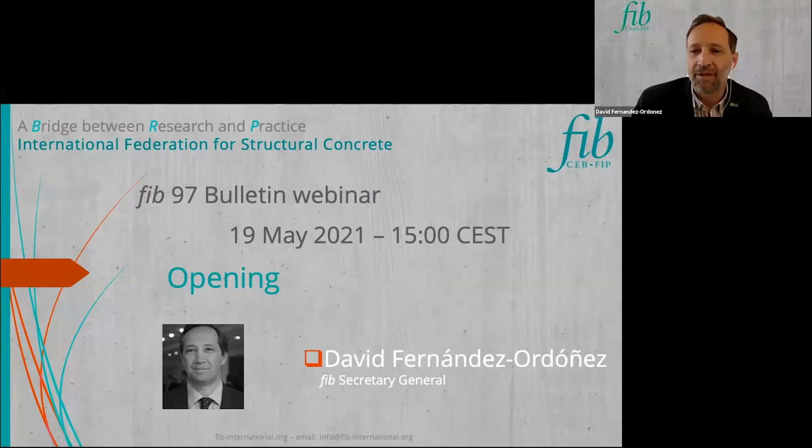The FIB is the merge of two former associations from the 50s, the CEB and the FIP. In '98, both associations, which had been collaborating for many years, created what today is the FIB. We have 41 statutory countries, as FIB is a federation of 41 countries, but we have members from more than 100 countries. So we have an association dedicated to structural concrete that is very widely represented in the world.

The FIB is organized around the general assembly, led by the countries. Then we have a technical council that takes all the main decisions, and a board that is the presidium, with the secretariat behind the presidium. Then we have all the commissions, task groups, and working parties, which relate to the technical council, the main technical body of the FIB.

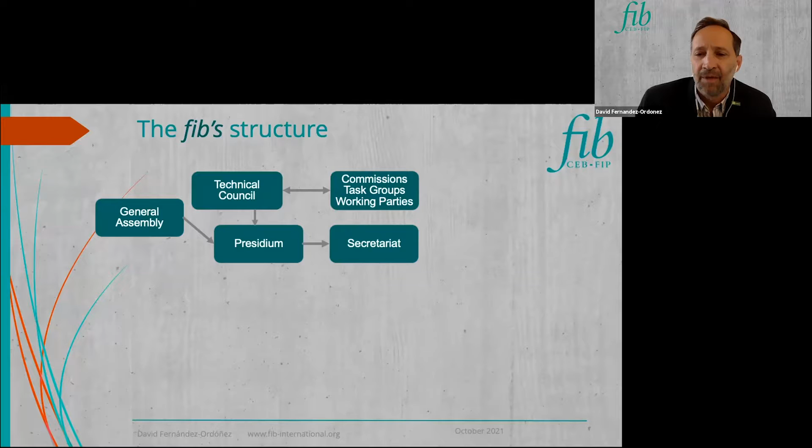As you can see, we have many commissions. Today we are presenting a document regarding Commission 5, Reinforcements. This is a task group within this commission. I don't have time to explain all the task groups in the FIB, but I can tell you we have more than 70 task groups developing documents for structural concrete technology.

We have several ways of publications. One is the journal, Structural Concrete Journal, which is now in a good position in civil engineering with a good impact factor. Something interesting here is for researchers to publish papers for free. With many countries, you can also publish open access papers for free, because there are agreements with some countries, for example Germany, Spain, Italy, and many others. So I would recommend you take a look, as maybe you can publish open access for free.

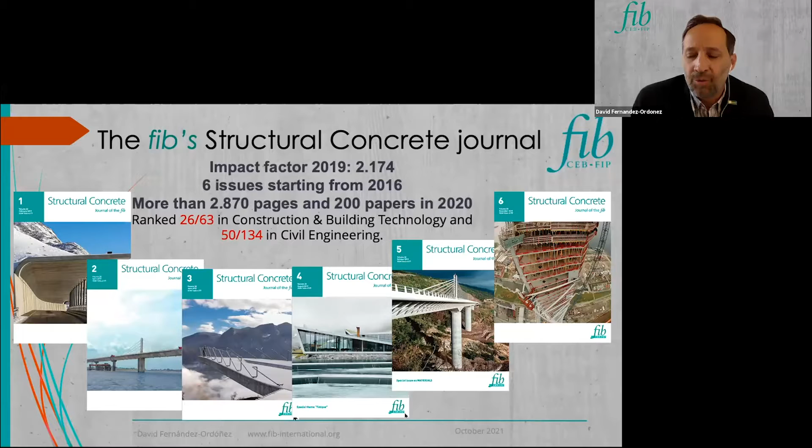As we are today with a lot of people from practice, we have a kind of paper that is very short, called project notes, simpler than a research paper. It's 3 pages and dedicated to nice projects. So maybe I would recommend that with the nice work you have done with your company, you try to bring some of these works to the journal. And then we have the bulletins.

We are presenting today one of the bulletins. As you can see, we cover many different topics, from prefabrication to fiber reinforced concrete or submerged tunnels. Today we are talking about pre-stressing. There's a lot of information about this, and you can find all of them on the FIB website.

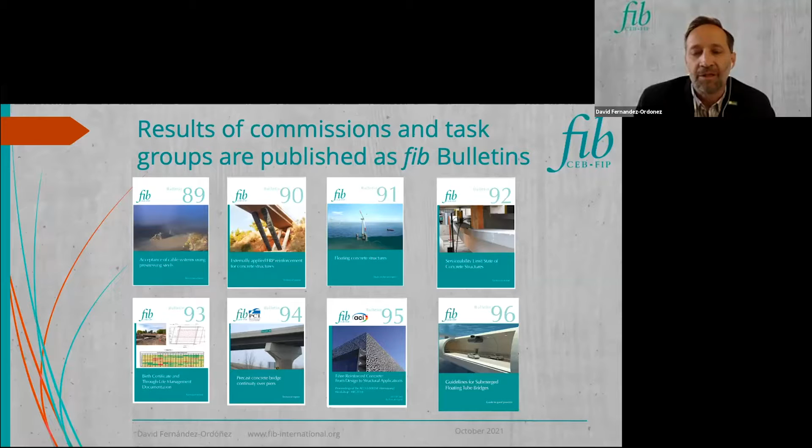I would like to tell you that on our website, FIB subscribing members and associate members can look at all the FIB bulletins, CEB documents, and FIB documents. They can see them in a viewer that is embedded in the website, which is very interesting if you want to find a document and take a look at it.

What are external tendons? External tendons for bridges, as we will refer to them throughout this webinar, are unbonded tendons made of pre-stressing steel, which means high-strength steel and low relaxation. These are tendons external to the concrete section, as opposed to internal tendons, and external to the concrete section, but located within the limits of the structural depth, as opposed to, for instance, extradosed cables. The FIB Bulletin 97 that we are presenting today covers the use of these external tendons on bridges.

Bridges are the sort of structures for which the technology was first developed and mostly used. But there are no limitations for application of the same technology for other uses. A typical example today is the use of external tendons in wind towers. But let me go back to bridges to explain a bit the history of that.

The history: the concept of post-tensioning has been recognized for over a century now, and interestingly, early development started with external tendons. If we go back to 1888, the engineer Peter Hugh Jackson filed a patent on internal and external post-tensioning concrete pavement. 40 years later, Eugène Freyssinet and Jean-Charles Séailles filed a patent on internal bonded post-tensioning, with the novelty that it was using high-strength steel.

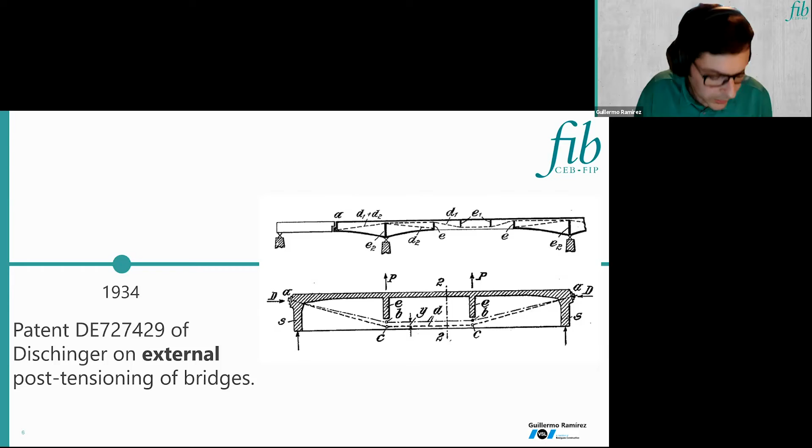It is the use of high-strength steel which soon enabled the crystallization of all these ideas and patents into actual structures. In 1934, Franz Dischinger filed a patent specific to our subject today: external post-tensioning of bridges. Shortly after that, the idea was brought to reality, and the first post-tensioned concrete bridge with external tendons was built in Aue, Germany. The tension was applied by externally arranged bar tendons using steel that could be restressed to compensate for the losses in stress due to creep and relaxation.

1938 saw a couple more early applications of external tendons using steel bars together with some innovative techniques. Near Stockholm, the Klockestrand Bridge, designed by Häggblom, was also built using external tendons made up of steel bars. And in Wiedenbrück, Germany, a bridge was built using external tendons stressed by application of the so-called system Finsterwalder, after its inventor. This system is based on stressing the tendons by direct action of the self-weight of the structure.

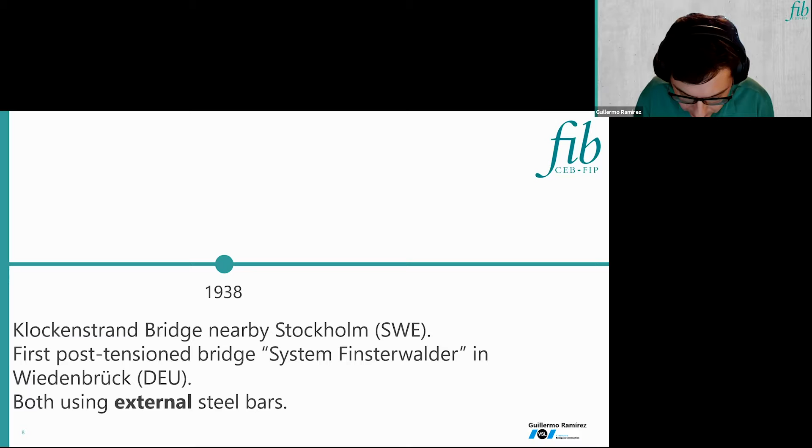Fast forward, during World War II, many military structures had been built using internal tendons, which helped develop and popularize this technique that soon became the state-of-the-art for concrete bridges around the globe. The steady progression of pre-stressed concrete in the 1950s to 1970s, stimulated by the reconstruction of Europe, requested efficient construction technologies for bridges, which contributed further to the development of post-tensioning with internal tendons, and therefore very few applications used external tendons until the late 1970s, when there was a resurgence of external post-tensioning in major bridge construction.

The design of larger bridges pushed the application of bigger tendon units, and these big tendons could not be embedded in the concrete webs without significantly increasing the web dimensions, which would have driven big increases in the structure's self-weight. The need to minimize this self-weight was a driver for external tendons.

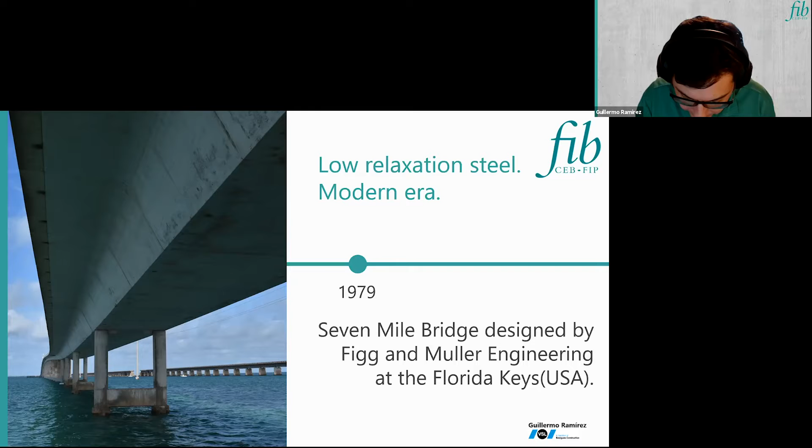Additionally, precast segmental bridge construction started to become more common. The use of external tendons in this kind of structure allowed fulfilling the need for continuous tendons through the joints. One of the first major applications of external tendons took place in the 1970s for construction of the Long Key and the Seven Mile bridges in Florida, USA.

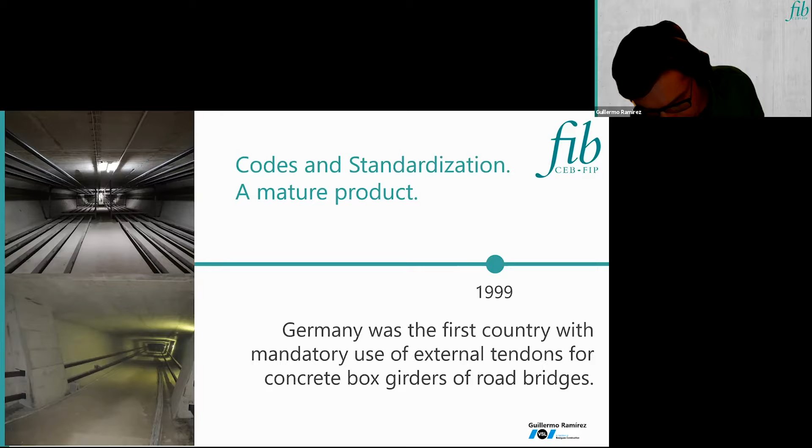1999, with the turn of the 20th century, it can be said that external tendons had reached maturity, and we started to see international codes, regulations, and standards being published. In 1999, Germany made the use of external tendons mandatory for road bridges built with concrete girders.

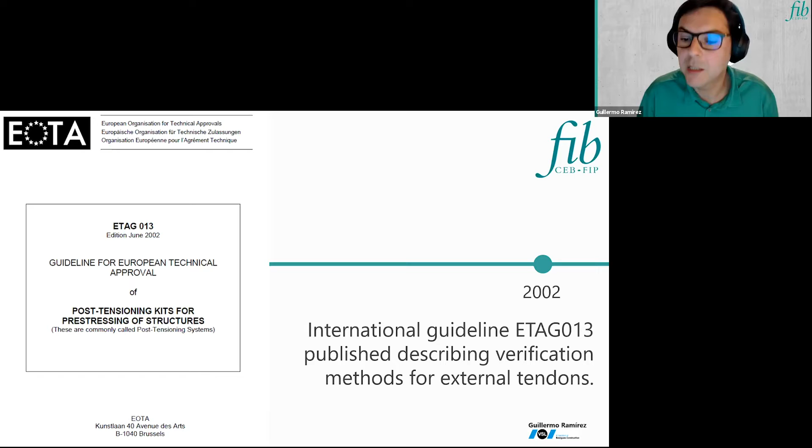2002, the first international guideline for technical approval was published, ETAG 013, covering all types of post-tensioning kits, including sections specifically describing verification methods of external tendons. In 2012, 10 years after ETAG 013 was first published, FIB Model Code 2010 extended the content of the previous model code and included rules for design and detailing when using external tendons.

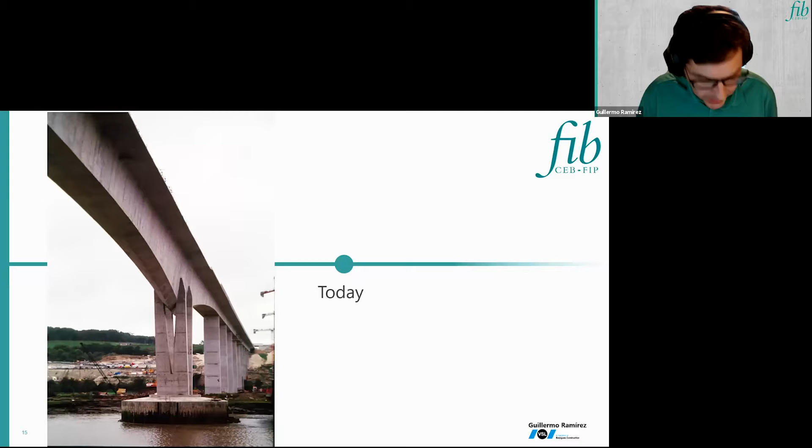And that leads us to today. More than 125 years after P.H. Jackson's first patent, external tendons have become a fully developed technology with applications on post-tensioning of segmental bridges, post-tensioning of box girder bridges, and strengthening measures.

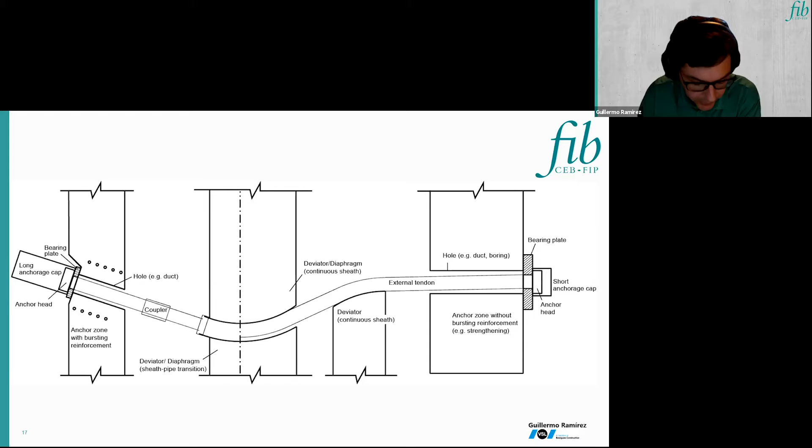Let me shortly present you now the primary components of these external tendons: anchor heads, wedges, bearing plates, long caps, short caps. The list of different components in an external tendon can be quite long, but a lot of these components are common to all types of post-tensioning tendons. Therefore, I will now focus only on a selected few which are specific to external tendons.

I will start with the main tensile elements and different combinations. As external tendons, we can find bare strands inside the global polyethylene duct with a filler, which can be either grout or soft fillers such as wax, grease, or gels, and we can have the same configuration with wires instead of strand.

Adding an additional layer of protection, there's the option of monostrands inside the global PE duct, all filled with cement grout. Still with strands, we can find some options as just described, but without the cement grout. These have

less layer of protection, and the outer ducts serve the purpose to help during the installation. The option is found both with round pipe and rectangular pipes.

To finalize this review of strand applications, we will see examples of single strands, either monostrands or epoxy coated. We also find tendons with post-tensioning bars. These bars are commonly found inside PE pipe with filler, again either grout or soft fillers, or wrapped with a tape system. You see there's quite a big variety as opposed to internal tendons. We do not typically have all these combinations.

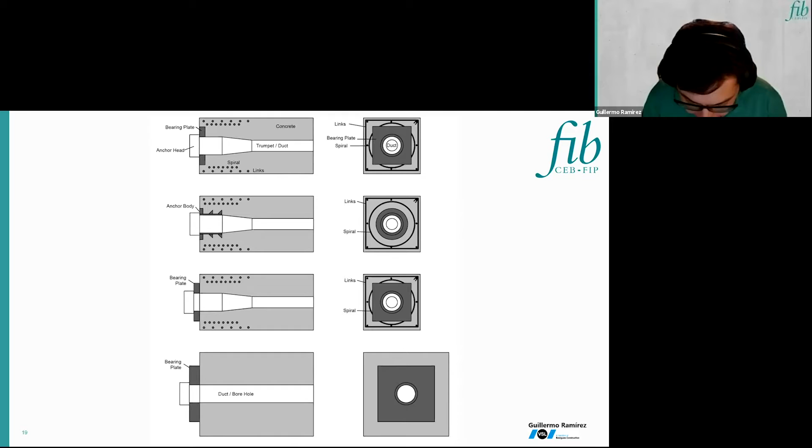If we move now to the anchorages, at first sight anchorages for internal and external tendons are not fundamentally different. They can both be composed of anchor heads, bearing plates, anchor bodies, and reinforcement steel, but there is one difference that I want to bring your attention to. Anchor bodies or bearing plates can be cast in structural concrete in combination with confinement reinforcement, only for new bridges or strengthening measures which include the addition of new concrete elements.

Some strengthening measures, though, require direct load transfer to old concrete. In these cases, additional confinement and bursting reinforcement cannot be installed, and then usually larger, specifically designed bearing plates are required.

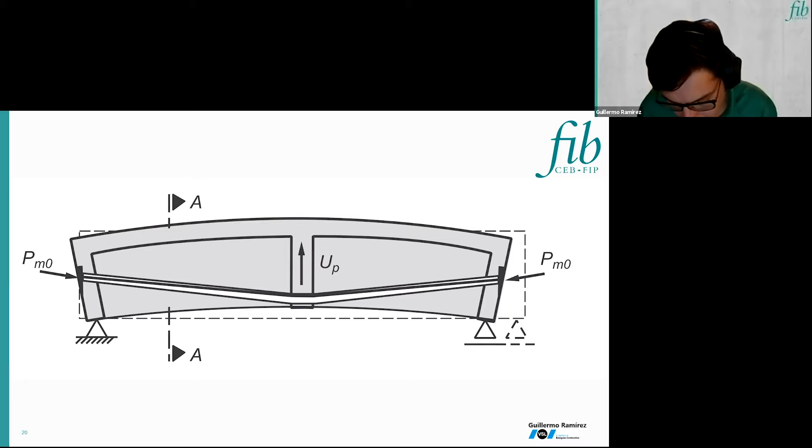In internal post-tensioning, the force is introduced continuously all along the length of the tendon. For external tendons, the uplift force is introduced through the deviators. Depending on the tendon layout and project requirements, a number of different solutions can be applied to deviate the tendon.

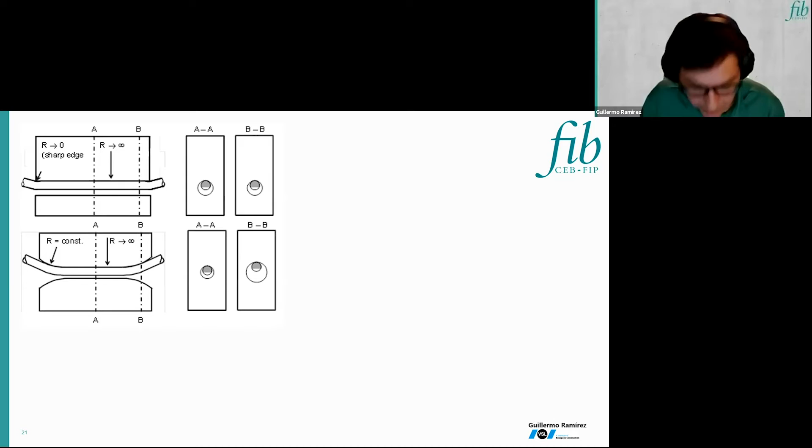We can have deviation around a sharp edge, which means a radius close to 0. This is acceptable for deviations smaller than 2 degrees at both sides of the deviator. But for larger deviations, a positive constant radius is mandatory. These radii can be achieved with different solutions, whether it's making use of diabolos, using oversized pipes with the addition of inserts, or with pre-bent tubes.

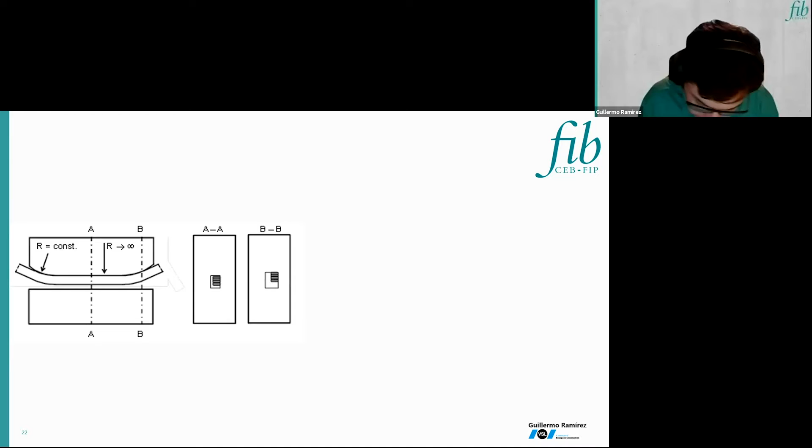For band tendons, box deviators are specially made with rectangular section, typically out of steel or polyethylene. And for monostrand bundles, matrix deviators are cast in the concrete with tubes to individually deviate the strands.

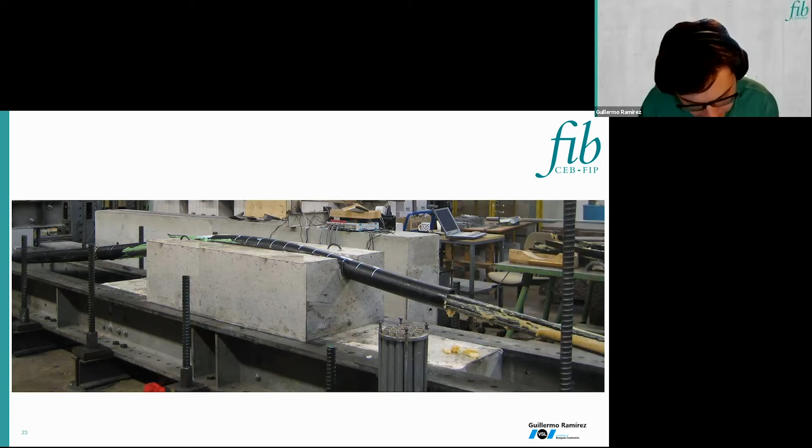All these types of deviators need to be tested to verify the integrity of the corrosion protection barrier after stressing. The European assessment document, which has a very long name, 160004-00-0301, which replaced ETAG 013, defines testing procedures for deviations with constant radius, as we can see in the picture, and deviations around sharp edges, as we saw in the previous slide. The acceptance criteria for all these tests is focused on the minimum thickness of the PE sheathing after the test.

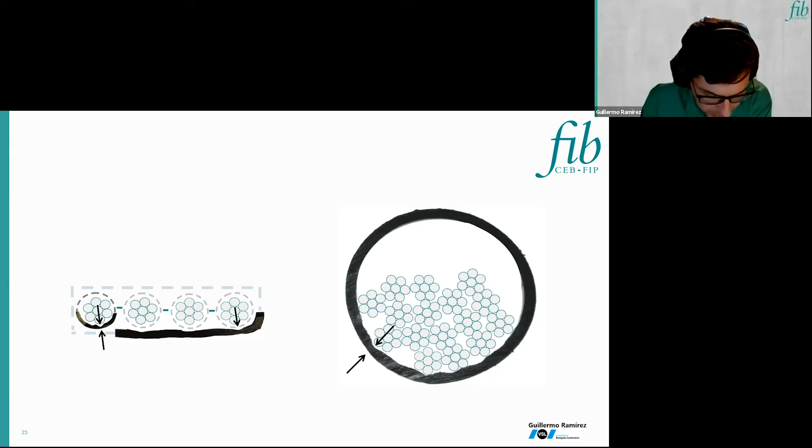And finally, fixations may be needed to prevent transverse vibration of the tendons. Fixations reduce the free length of the tendon, and depending on the geometry of the bridge, the size of the tendon, and the local codes or recommendations, this vibrating free length should range between 35 to 70 meters, as 70 meters, for example, was the case of a very long tendon installed to strengthen the Inbrücke Neuhaus viaduct.

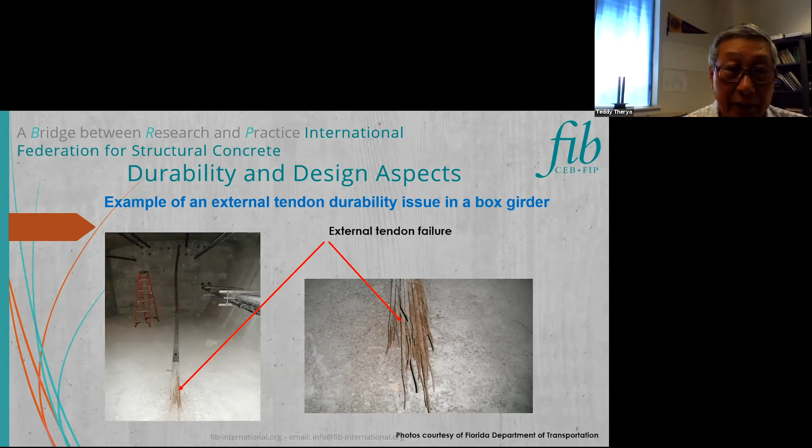Let's first talk about corrosion basics. Corrosion is really a deterioration of material, or metal in this case, because of reaction with the environment. So environment plays a key role in formation of corrosion. Corrosion requires oxygen and water to form the corrosion mechanism. So without one of them, no corrosion can be formed.

So in our design strategy, we have to make sure that we create a barrier against the agents that cause corrosion. Elimination of one or two of the following corrosion promoters is our objective in corrosion protection. So humidity, for example, larger than 40% relative humidity, is harmful to our post-tension tendon. Oxygen, water, chloride ion, stray current, and other corrosive agents.

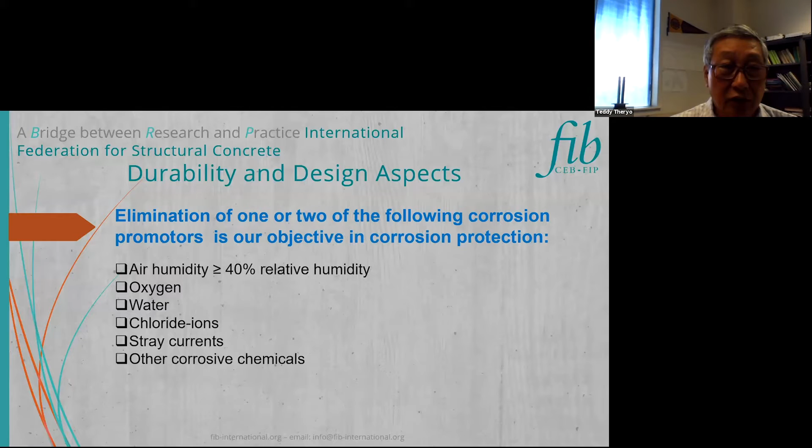The typical root cause of external tendon durability issues is damaged duct, cracking in the PE duct, so you lose the protection. Also grout void at the high point, the anchorage, as a result of bleed water, and grout void as a result of poor construction practices. Tendon corrosion failure as a result of water and oxygen intrusion.

Actually this is lack of corrosion protection. And also tendon corrosion could be caused by unsuitable grout material. This grout material could cause soft grout, for example, that happened on several projects here in Florida.

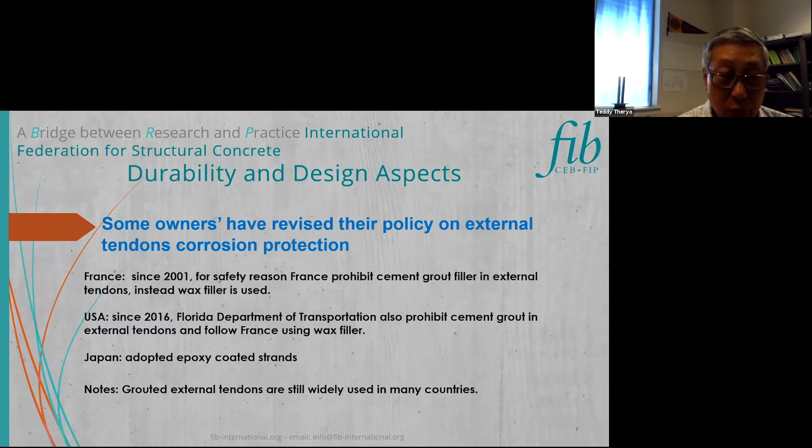Some owners have revised their policy on external tendon corrosion protection. For example, France and the Florida Department of Transportation in the US have implemented using wax filler instead of cement grout. So both of these owners have actually prohibited cement grout filler in external tendon bridges. In Japan, using a different approach, they adopted epoxy coated strand. But keep in mind, grouted external tendons are still widely used in many countries. If this is done properly, grout can also provide good protection to your tendon.

After the workshop, FIB created a model for what type of corrosion protection is needed, depending on the structural protection layers and the aggressivity and exposure to environment. So there's protection and action. For example, if you have very low structural protection and a very high aggressive environment, you really need PL3 protection level. If you have very high structural protection layers and very low exposure, what you need is only PL1.

So what kind of protection? Each owner and consultant that designs this bridge has to make sure that they follow the national code, whatever protection the national code requires.

This is guidance for owners around the world. The next slide shows PL1, PL2, and PL3.

PL1 is a regular tendon where you still can use metal duct and grout it. PL2 has to be encapsulating - the tendon has to be encapsulated from end to end, leak tight, with plastic duct, all of those. Then PL3, you need to add PL2 plus monitorable or inspectable at any time, for example using EIT, which is electrically isolated tendon.

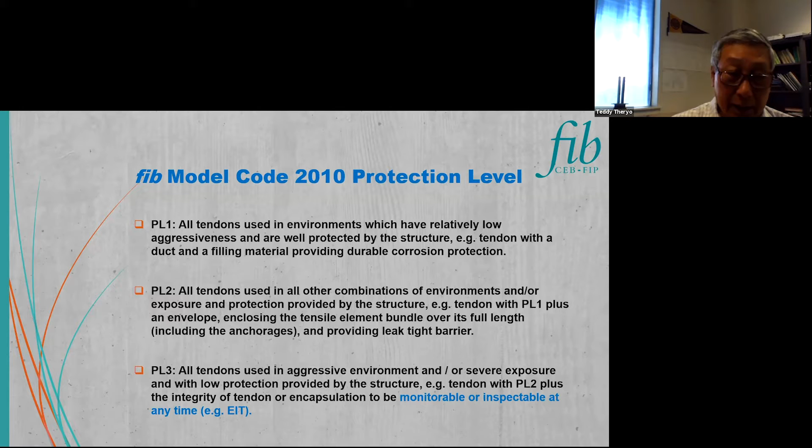Protection measures for pre-stressing tendons typically are HDPE duct, cementitious grout, flexible fillers such as wax, grease, gel, epoxy-coated strand, and dehumidification, electrically isolated tendon. So we could typically combine some of these protection measures in our project.

Now I'm going to move to the design aspect of external tendon. Why do we consider external tendon in design of new structures?

One of the benefits is that with external tendon, the concreting of the member can be improved because there's no internal tendon in the member. So you can have a thinner member, ease of installation, and most importantly, replaceability - you can replace this external tendon at any time.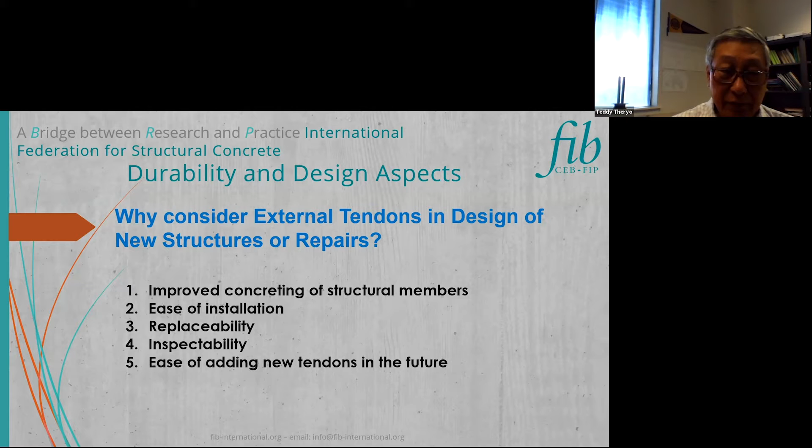Inspectability - you can inspect them because they are external, so you can see them with your naked eyes. Also ease of adding new tendon in the future. If you have any issue of deflection in the structure, you can add a future tendon. So make sure in our design, we prepare an extra hole in the deviator and also in the diaphragm for this future tendon.

Essential design aspect of external tendon: we need to be aware that the behavior of external tendon is quite different from bonded internal tendon, especially beyond the cracking level of the structure.

We know there's no strain compatibility in external tendon with the surrounding concrete, and this is quite different behavior from bonded internal tendon. Fatigue is less of a problem for external tendon.

Typically the tendon path follows the polygonal shape formed by deviators. Deviators play a very important role in external tendon, so we're going to talk a little bit more about that later.

In design, we use the equivalent PT forces introduced at the deviator location, applied to our structure. External tendon is assumed as unbonded in design, regardless of whether this tendon is grouted or non-grouted. Typically external tendon has less eccentricity compared to internal tendon.

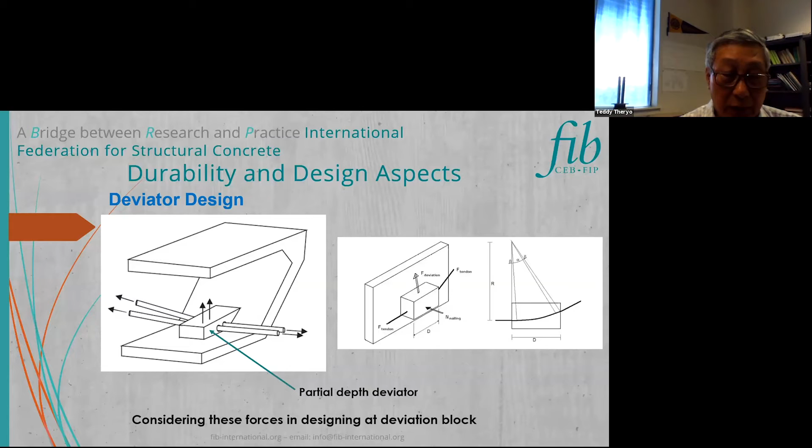This shows you the deviator, because we have to properly design the deviator in order to make the external tendon work. A failure in the deviator means a failure in this external tendon. So we have to make sure that the forces exerted from this external tendon are properly accounted for in the design of the deviator.

This picture shows the applied PT equivalent load from the external tendon applied at the deviators, which is then subjected to the structure that we are designing.

This example shows external tendon with 2 deviators. I think Guillermo talked about the diabolo. This shows the different detail compared to the old conventional external tendon, where typically they are bonded at the deviator. In this case, we have a diabolo, and the tendon is sliding in this deviator.

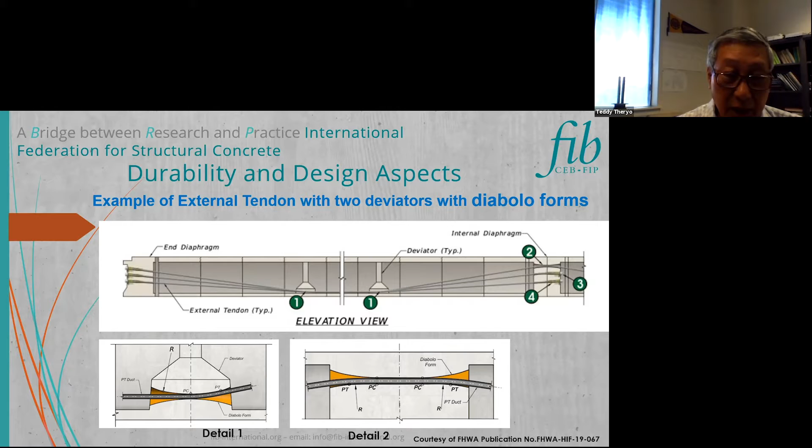So we can remove this tendon very easily, but make sure we design this diabolo properly, as you can see. This is detail 1 and detail 2, and we also use the diabolo here.

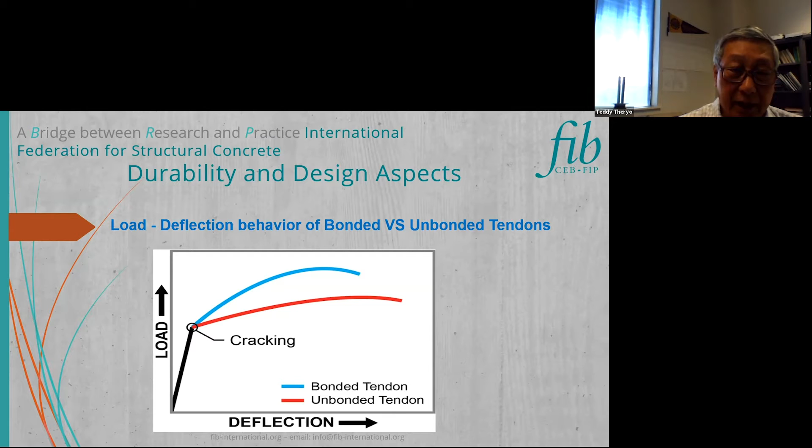There's no difference up to that point. When beyond the cracking load, the behavior is quite different - bonded tendon can achieve higher ultimate strength than the unbonded tendon.

In the design method at serviceability limit state load combination, there's no difference between bonded and unbonded when you do the design. At ultimate limit state, the unbonded tendon stresses are typically lower than the bonded tendon.

So how is the ultimate limit state stress computed or estimated? In general, there are nonlinear analysis methods these days that can be done. There's a lot of software that can handle nonlinear analysis for external tendon, and empirical equations are also quite often used to estimate the ultimate stress of unbonded tendon.

In the US, for example, the AASHTO LRFD code has used an empirical formula to estimate the ultimate stress. On the other hand, Canada uses a different approach, which is the most conservative. In Canada, when you design external tendon, the ultimate stress is at the same level as your effective stress in the tendon after all losses.

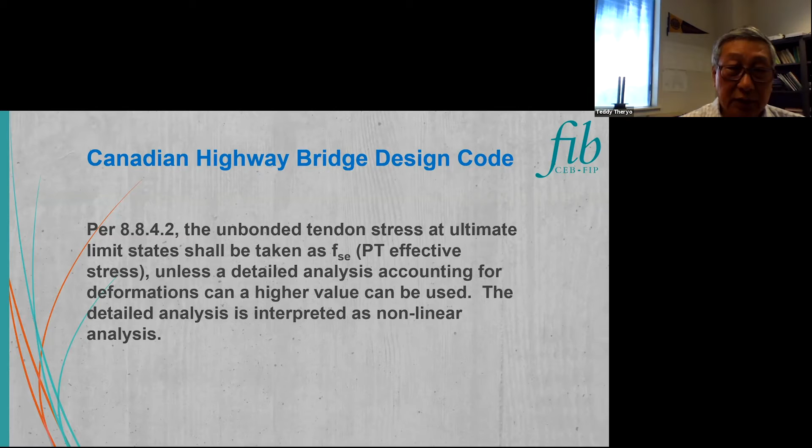We did some study at FDOT on the differences between nonlinear analysis and this formula. We found that nonlinear analysis is a viable and the most accurate tool in predicting the ultimate stresses of unbonded tendons. However, it's time consuming and requires accurate material properties. So empirical equations are practical and provide reasonable accuracy in predicting unbonded tendon ultimate stresses.

It's also important to mention future tendons. When we design external tendon bridges or even post-tension bridges, we need to provide future tendon provisions in the form of extra holes in the deviator and also in the diaphragm. So both AASHTO LRFD and FIB 2010 require a minimum 10% of the primary pre-stressing forces for future tendons, so you can insert a future tendon to add to your structure.

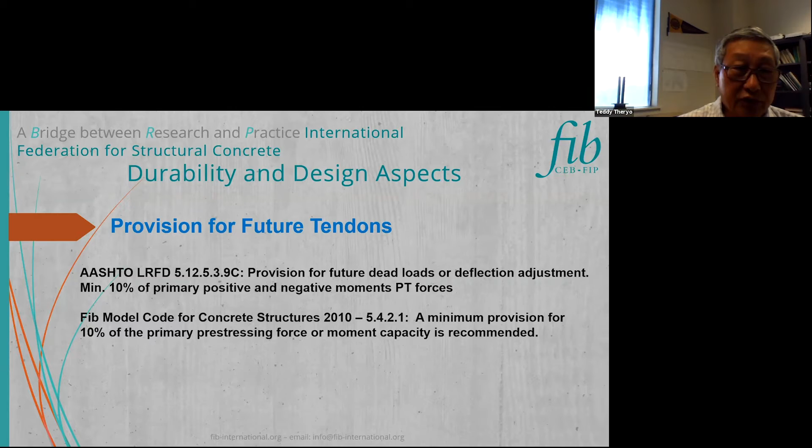One of these projects, in Florida, USA, is called Sunshine Skyway Bridge. This is from 30 years ago. This bridge utilizes external tendon for almost the whole bridge, from the main span of the cable stay, including the high level approach. They are all precast segmental, and external tendon was extensively used for this project, including thousands of external tendons.

What you could see here is using 19-0.6-inch strand with cement grout. Of course, with new projects in Florida, we no longer allow cement grout in Florida, so we're using wax now.

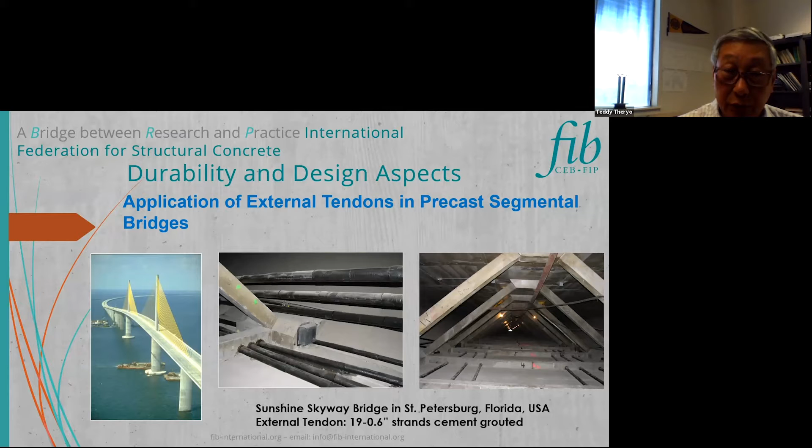Hello everybody, my name is Christian Gläser, and in the following minutes I want to talk about external tendons in new structures. After we learned about the key components, design and durability aspects in the previous presentations, I want to focus on the installation of the various PT or external tendons we are using, and will guide you through the key elements before, during, and after the installation of these tendons.

As most of you know, there are different types of structures, and I tried to classify two types: external tendons used as primary post-tensioning, so tendons that are installed and stressed after casting of the individual span, with simultaneous activation of the self-weight. That means these type of tendons are in the critical path of the bridge construction.

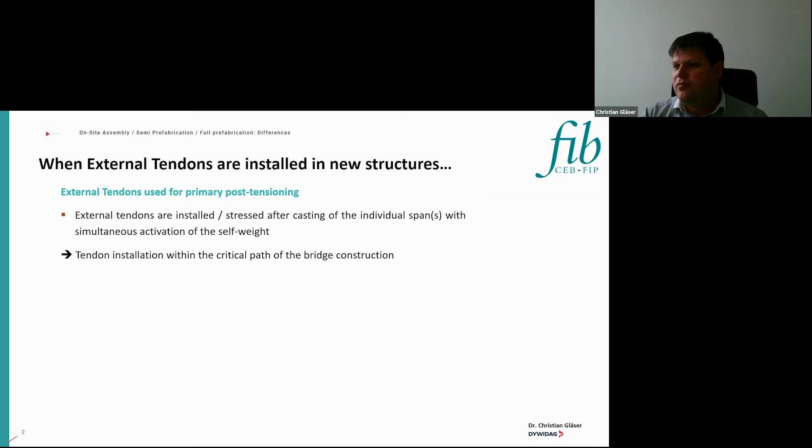Additionally, we have external tendons used for secondary post-tensioning. That means we usually have the entire bridge completed, all spans completed, and at the end, for the live loads, external tendons are installed, which is at least for Europe and Asia the majority of all applications.

In the following, I will always differentiate between three major types of tendons, and the difference comes from the different way of assembly. There will always be tendons that are on-site assembled, semi-prefabricated ones, and fully prefabricated tendons. There are, of course, a lot of pros and cons for the individual ones, and I will guide you quickly through the key differentiators, but I will consider this in all the installation aspects.

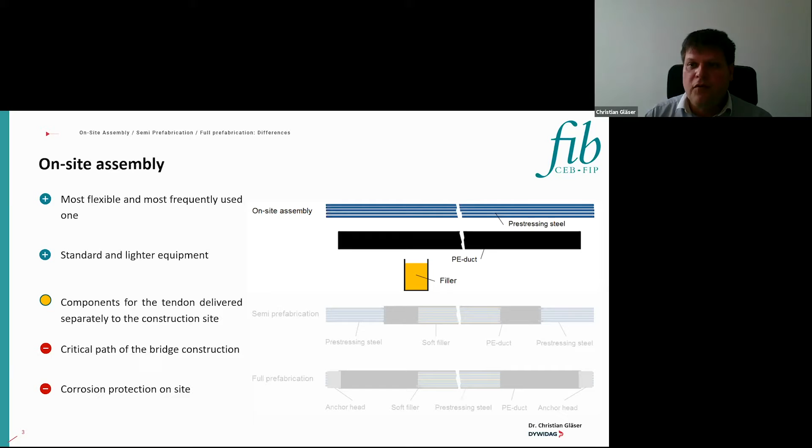Starting with on-site assembly, it's the most flexible and most frequently used method. Installation, stressing and so on, is quite similar to what you know from standard post-tensioning. We are using similar equipment, maybe special equipment for corrosion protection, which we'll come to later. The components are separately delivered to the construction site. The negative aspect is, if this is in the critical path of bridge construction, time constraints are quite important to consider. And from the corrosion protection perspective, it is applied on the job site, meaning we have influence from weather, field conditions, and so on.

Coming to the partial or semi-prefabricated method, the advantage here is that the free length of the tendon is prefabricated. That means, for example, corrosion protection on the free length is applied under constant conditions, considering weather, and you have standard working procedures in a plant instead of in the field.

Still, you have the chance here to adapt the length of the tendon on the field, but the connection to the anchorage needs to be done on the site. That's one of the negative aspects, that the prefabrication and thereof also the corrosion protection is only done in the plant for the free length. So especially this connection to the anchorage and the anchorage zone itself needs to be corrosion protected on the site. And already there are some limitations for size and length of the tendons as this is prefabricated.

Coming to full prefabrication, this means a prefabrication including the anchorages, and in case of the external tendons, that's easy to do with having both anchorages installed, connected with the duct, and to even have this connection working during the stressing. This needs to be a tension stiff connection between the anchorage and the PE tube.

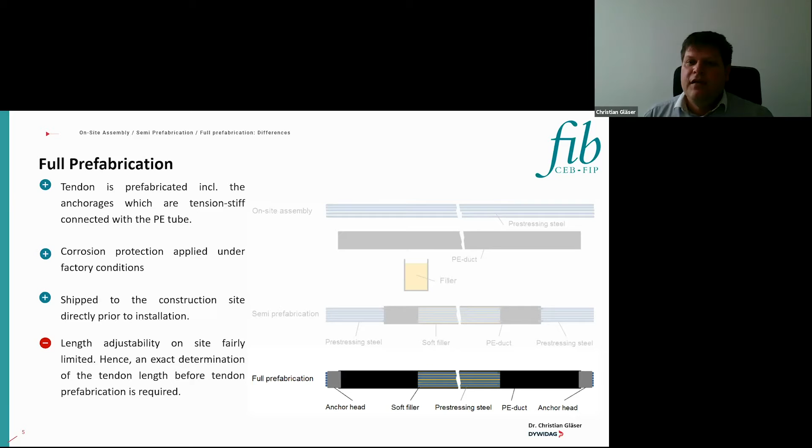The advantage is, of course, corrosion protection can be applied under factory conditions, so standard processes, no weather influence, good quality control. The complete product is then shipped to the construction site more or less just in time or directly prior to the installation. What's the negative aspect here is there is almost no adjustability of the length on the site, so before the tendon is produced, an exact determination of the tendon length is quite important.

So with these three different types, I will now walk through the different steps, starting with job site activities we have to do before the bridge or the bridge segment is casted. Here a lot already really high requirements are for the geodetic works, meaning we need to ensure the free passage and the correct profile of the duct or of the tendon through the entire path of the tendon.

Starting with really a very accurate positioning of the components, fixing them, and also having really here a detailed look into, let's say, all deviation areas.

So after the concrete is hardened, or once we are ready to install our external tendons, we have to take special care for a correct positioning of the deviators. You see, for example, a solution with these half shell elements that needs to be exactly placed in the deviation pipes to enable here really a good, a perfect deviation of the tendon.

All deviation zones need to be clean and prepared to allow a proper elongation and to avoid any damaging of the duct during the installation. Temporary intermediate supports along the straight lengths are required, and of course for grouting vents at high positions are required.

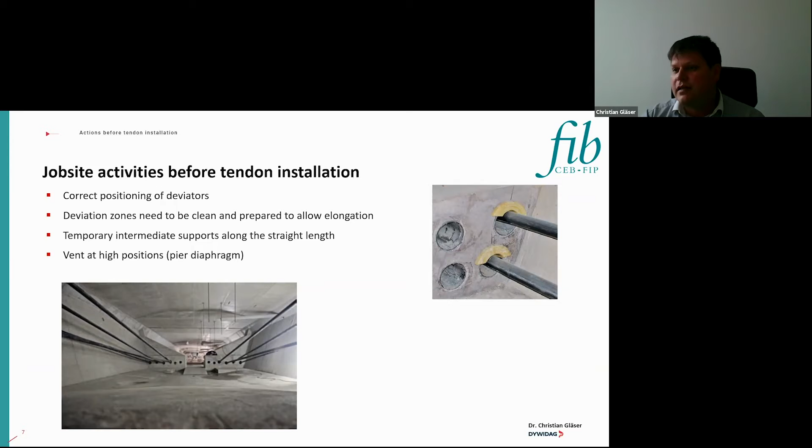Temporary corrosion protection is essential, so the pre-stressing steel needs to be protected at any time. In case of a prefabricated fully encapsulated tendon, that's quite easy because the corrosion protection is already applied in the factory, so no special care needs to be done during the installation or before and after stressing, because the tendon is already corrosion protected.

For the other cases, we need to make sure that the time between installation, stressing, and corrosion protection is limited, and the permissible time slots specified, for example, in FIB Bulletin 20, are roughly 4 weeks, and in case we have aggressive environment, this should not exceed 2 weeks. So if these times cannot be met, temporary corrosion protection is required.

Coming to the installation itself, starting with on-site assembled tendons, the first step is the assembly of the duct system on the entire length of the tendon path. The duct usually is shipped in parts, so the individual pieces of the pipes need to be connected, typically by electrical welding. And of course there are also some cases, as we have seen in the slides from Guillermo, where pre-installed bent duct pieces are part of the duct and need to be included as well.

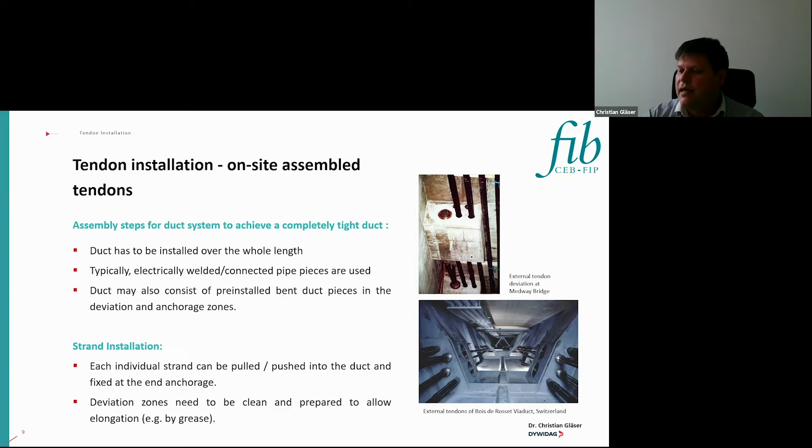Coming to the strand installation, this can be done either by pulling or pushing the strands through the duct and fixing them at the end anchorage. And again, latest here we have to double check that really everything is absolutely clean and absolutely prepared to allow a proper elongation.

Coming now to the partially prefabricated tendons, usually they are pulled into the duct, so it needs to be considered that the duct is not damaged during this pulling process. And in the anchorage zone or close to the anchorage zone, the sheathing is removed before connecting the partially prefabricated tendon to the anchorage. In case of the fully prefabricated tendon, installation is quite similar, meaning again pulling, considering that we are not damaging the duct.

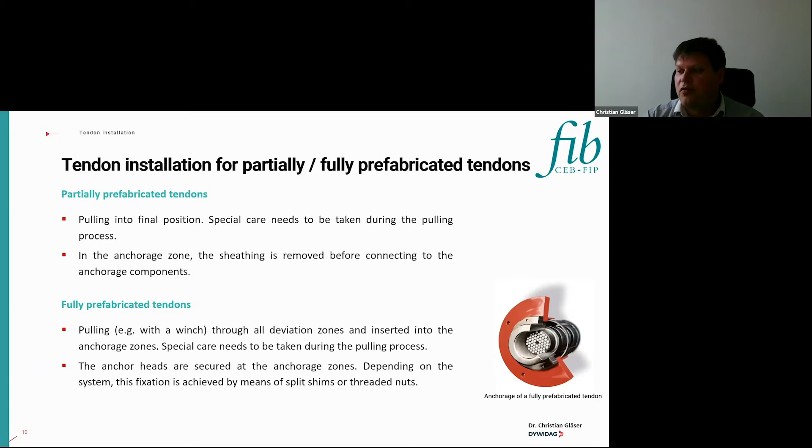Here the advantage is that the anchorages are already assembled, so this means now we can directly stress it. We don't need to remove any sheathing in the anchorage zone. It can be directly stressed and then fixed by split shims and threaded nuts at the end anchorage.

Stressing itself, starting with some general aspects. The standard process is quite similar to what we know for internal pre-stressing. We also make measurements during the stressing at several load steps and at the final load, like force and elongation. But what is additional and quite recommended is also measuring the movement and elongation of the duct or sheathing over the full length, especially at the deviation zones, to see if there is any untypical movement, which should be identified if it's happening.

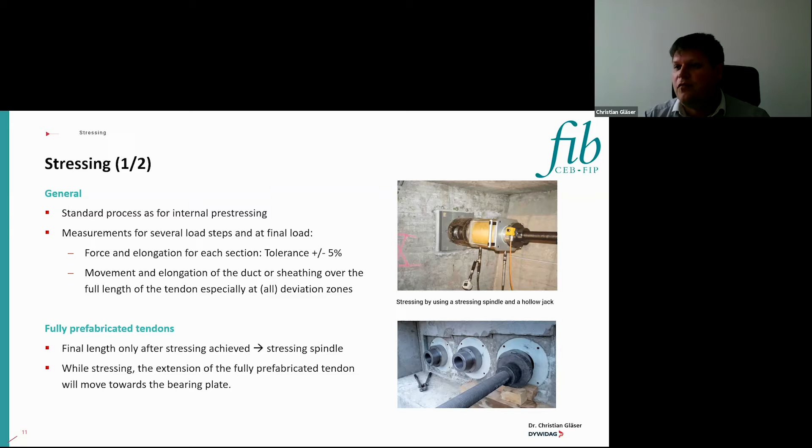For the other types, on-site assembled or partially prefabricated tendons, it's the standard stressing procedure as usually done for internal post-tensioning. That means the anchor head remains fixed and only the tensile elements elongate during stressing, usually by strands, when these tendons are anchored. An important message is that cutting off the protruding pre-stressing steel shall only happen after the designer has accepted the stressing record, because after this it will be difficult to unstress the tendon again.

Some special application or special type of tendon is quite frequently used in the Benelux area: bundles of monostrands inside a PE duct filled with grout. Here the stressing procedure is a little different. An initial force is applied first to remove the slack on the tendon. After that, the ducts are grouted, and after the grout is hardened, the tendons are finally stressed to their final force.

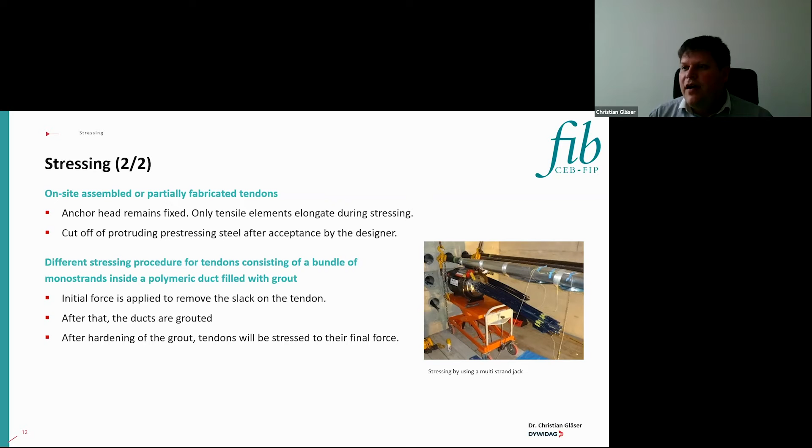Just some comment on possibly restressing. Restressing is possible as far as we can guarantee that, for example, wedges will not have the same gripping in the areas that originally was done. So it's recommended always to have an additional elongation of minimum 15 millimeters to avoid any fatigue problems in the free length.

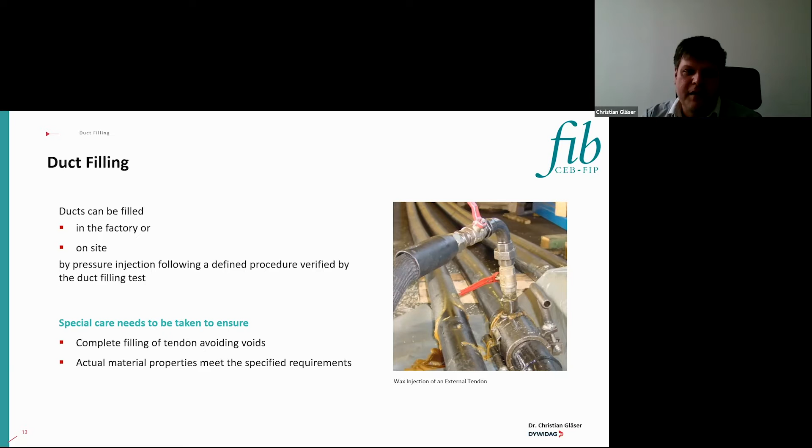Duct filling or corrosion protection is then the next step. For all types of tendons, this needs to be done either in the factory in case of the prefabricated ones, or on-site for the tendons assembled on-site. In principle we always have the same requirements: we need to guarantee complete filling of the tendon and avoid any voids in the filling, and of course we have to consider that all the requirements on the material itself are met.

Starting with partially or fully prefabricated tendons: for these types, only soft fillers can be used, because otherwise coiling will not be possible. So the fillers are typically ones that need to be warmed up or have a thixotropic behavior. All the ducts have inlets and outlets or vents to allow a proper filling of the duct, and during the duct filling, of course, a quality control needs to take place.

In case of monostrand tendons, usually all the protection on the free lengths is directly done at the strand manufacturer, who is directly assembling the extrusion of a PE sheathing over the grease layer on top of the strands.

For on-site assembly, I'm focusing here on soft fillers, but it's also described in the Bulletin for cementitious grout. Just some thoughts about the way of the injection: especially in case of soft fillers, we need to make preparations to avoid leaking soft fillers reaching the groundwater. That might be an important thing to consider quite early in the job site planning.

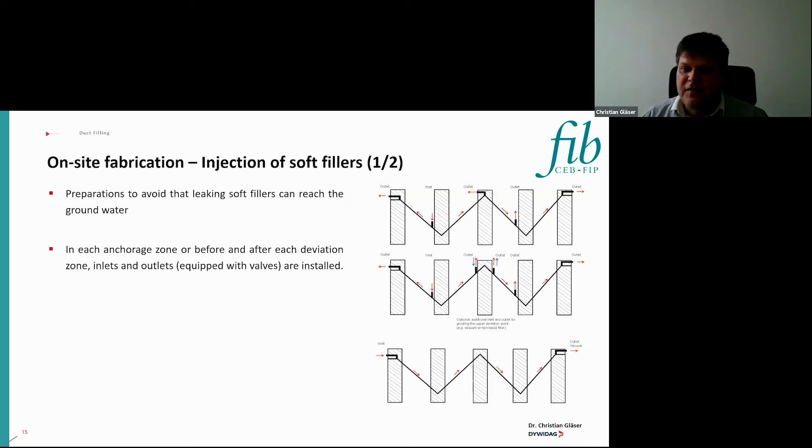That is, of course, the most sophisticated method, but all these options are available. We need to make sure that all the soft fillers are still liquid, so that everything can be filled, especially the high points. And as I already mentioned, it can be necessary to re-inject these areas additionally.

Just some photos of a typical layout for on-site assembly. Quite important, as I mentioned, is the quality control. There are different ways, for example by temperature measurements, by knocking with a hammer, and a lot of other aspects, as you can even see here.

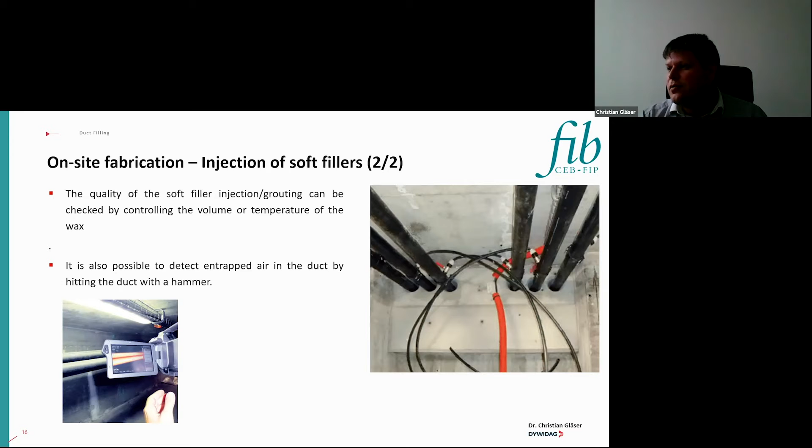Documentation: we need almost the same as we have for the internal post-tensioning. So we need calibration certificates for the stressing equipment. We need to prepare and submit the stressing records with force elongation, and even the comparison between calculated and actual elongation.

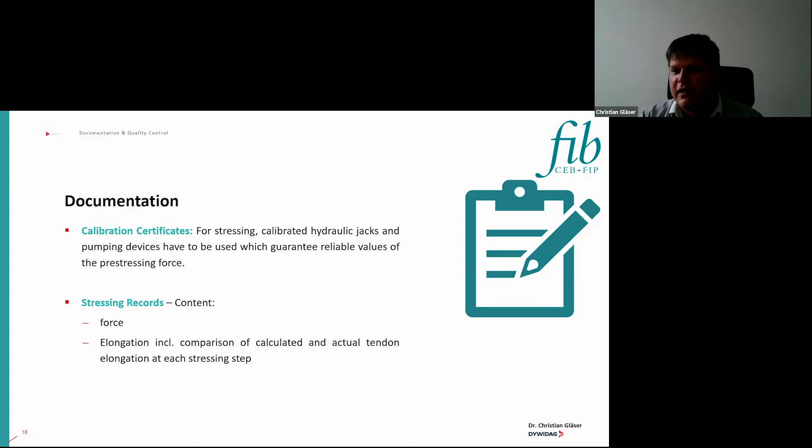Finally, just some words about quality control during the execution. At all stages, quality control by an external party can be necessary and recommended. Before the stressing, all the calibration documents should be checked that they are still valid and so on. After the stressing, we should do a first visual inspection of all the tendons, for example checking the corrosion protection, that it's fully filled, by knocking on the tendons to see that they are fully injected.

Hopefully I could give you an overview about some major aspects during installation of external tendons in new structures. I want to hand over to Hermann Weyer, who will now focus on repair and strengthening, related to existing structures. So Hermann, can I take over to you?

Thank you, Christian. I'm talking about using external tendons mainly in strengthening projects for bridges, but also some other aspects. I will not show a lot of text this time. The text you can read in the FIB Bulletin, everything is described there quite well, and I will focus mainly on some pictures.

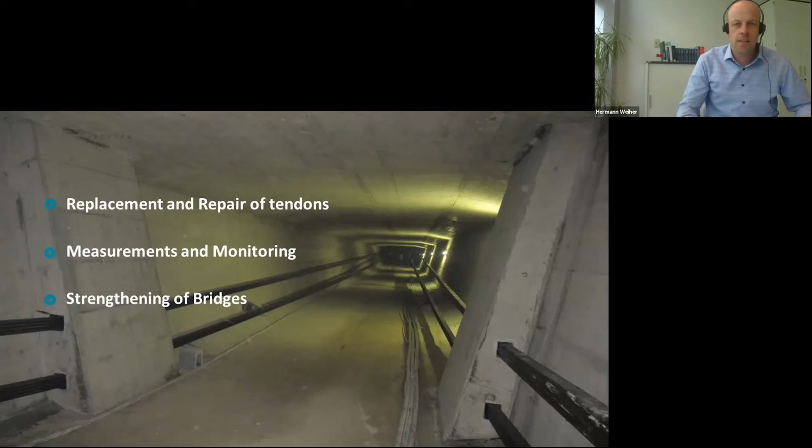I will cover three topics. One is replacement and repair of tendons, just briefly. The second one is measurements and monitoring of external tendons. And finally, I focus on case studies for strengthening of bridges.

Replacement and repair of tendons sounds a little bit as if there is a need to do that. Usually they are very shiny and have very good quality. One big benefit in construction is that you can have access to the tendons and you know what happens there. And in some cases, damages are not avoidable.

Here you see a kind of improper saddle type. It's improper because it cannot compensate for misalignment. In this case, you have a damage at the corrosion protection. Usually damages to the corrosion protection can be repaired.

One repair method is just to make a hull around the whole deviator and fill it with, e.g., wax, making sure that no air is entrapped. By that, you can upgrade the tendon again. If you have structural issues, then of course replacement is the preferred method. Here we have a second benefit of external tendons: that they're not only accessible but also replaceable.

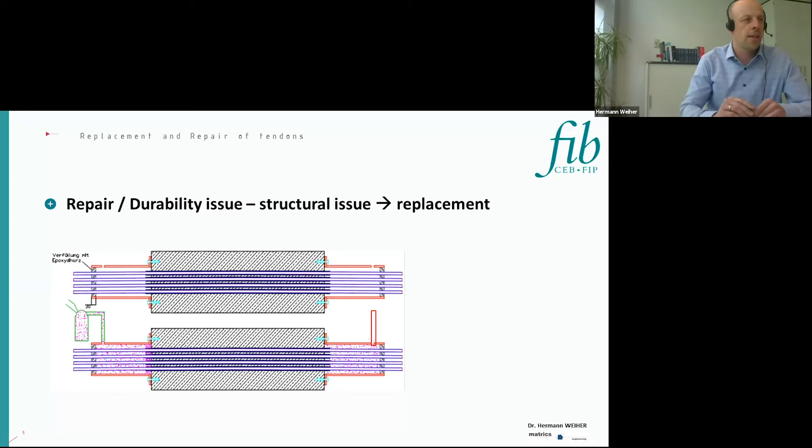For replacing external tendons, some procedures can be followed. If you have a grouted tendon, first you need to remove the existing one, and then you can install the new one. For the installation of the new one, you can follow the explanations Christian had given. For de-installation of the old ones, you can follow step-by-step procedures as described in the Bulletin.

For grouted tendons, this can be quite dangerous if you cut wire and strand by strand. The force can be reintroduced by bond into the other strands, and finally you can have a brittle failure of the tendon. It can hurt, and special care is needed for that. For soft filler, this is quite easy: you can detension, or you can cut strand by strand, and each one is detensioned individually, and usually you have no big problems there.

The second bullet point, measurements and monitoring, is mainly about load measurement. Everybody likes to know the load in the external tendon. You can do a lift-off check, as shown here, where the jack grips the strand or bar directly, or grips the wedge block. In any case, if you do that, you need to remove the cap afterward, and when you close it again, make sure the corrosion protection is upgraded.

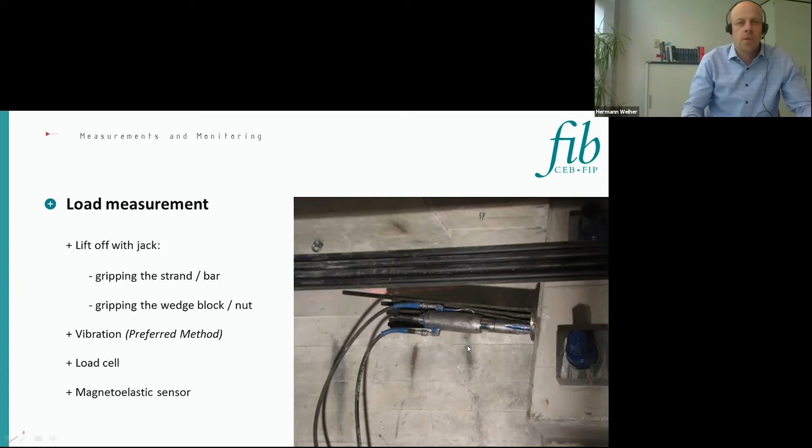There is a preferred method, which is vibration measurement. That means you are measuring the acceleration, and together with the span of the tendon and the mass of the tendon, you can derive the tendon force quite well.

There are more methods like load cells and magnetoelastic sensors. These sensors mainly need to be installed prior to installation, but there are also solutions, like shown at the bottom, that can be installed later on. With these measurements, you can also achieve long-term and permanent measurements.

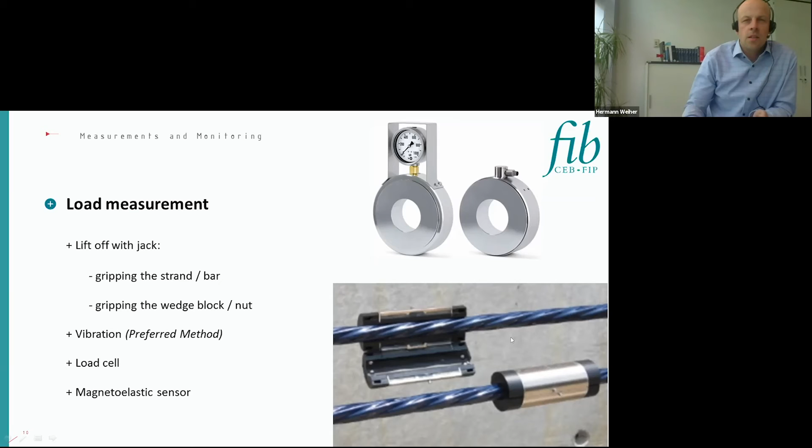Of course, there are more measurements that can be done. One is the elongation of the duct, to know about the sliding mode and so on - this is important at deviators. For some tendon types, you can measure temperature, the volume of grout or wax that you bring in, and also the pressure of the grouting.

Finally, I come to case studies of strengthening of bridges. External tendons are very cost effective when it comes to upgrading concrete bridges. Concrete has very good compression resistance, but with the help of tendons, you can activate that also for bending and tension.

This is either for renovation of a bridge or to upgrade a bridge for higher load models. External tendons are also effective because they act against the dead load too, not only against additional loads like passive strengthening measures. And if needed, you can have an uplift force.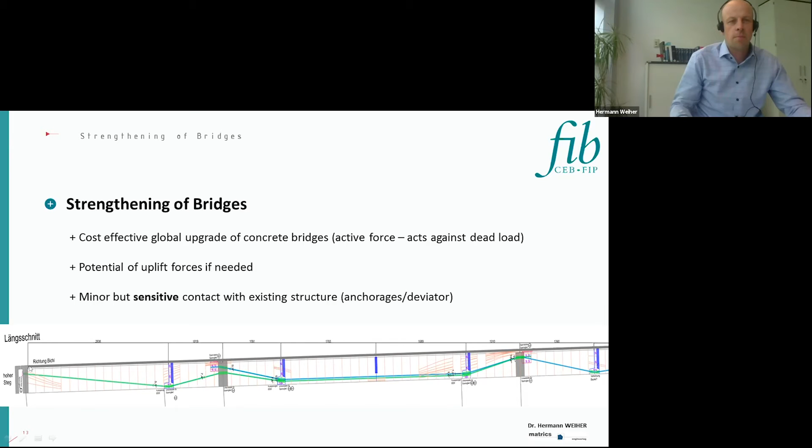At the bottom, you see one example: a longitudinal section of a concrete T-beam bridge strengthened with external tendons. In green, you see the tendon path, and you have very little contact with the existing structure - mainly at the anchorages and at the deviators. I'll go on to longitudinal tendons.

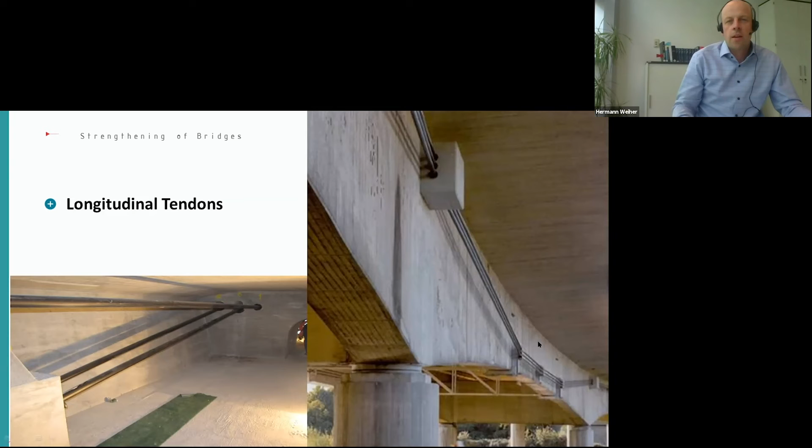You can apply them just straight, like this strengthening measure close by Munich. Of course, you can act against the bending moment better if you deflect them, like here. There is a deflected tendon on the left inside a box girder, and on the right it's outside a T-beam. Here you can see quite well the connections to the old structure - you need to be very careful here, but I will discuss that later on.

Of course, mainly strands or wires are used for longitudinal tendons, but bar tendons can also be used. In this case, only straight pre-stressing is possible.

In addition to longitudinal tendons, we have transverse tendons in new construction. In the past, this type of tendon had been used internally, but the state of the art at the moment is that you cover all transverse forces with internal rebar. Maybe just the deck slab is pre-stressed.

But for strengthening, you have no choice - you need to apply external tendons. And if you actively want to act against the dead load, which is important for very heavy concrete bridges, then external tendons are very important.

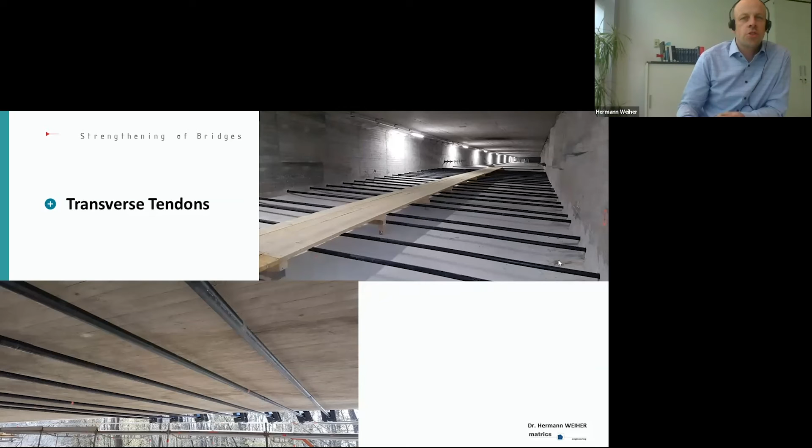So here you see vertical tendons, used against shear and torsion. But horizontal tendons are also possible. Here, this is against horizontal shear at the connection between the webs and the bottom slab.

Coming to some details, anchorages can either be supported at old diaphragms or clamped to the web. If you have a support against an existing diaphragm, you have no opportunity to arrange a spiral or so, then you need quite a massive anchor construction to get the high forces into the structure. Of course, you need to design whether the diaphragm is able to resist that.

You can strengthen the diaphragm at the backside. There are different possibilities.

That's why you need massive anchorages. But the big benefit is you need only few of them, since cables can have a length of several hundred meters.

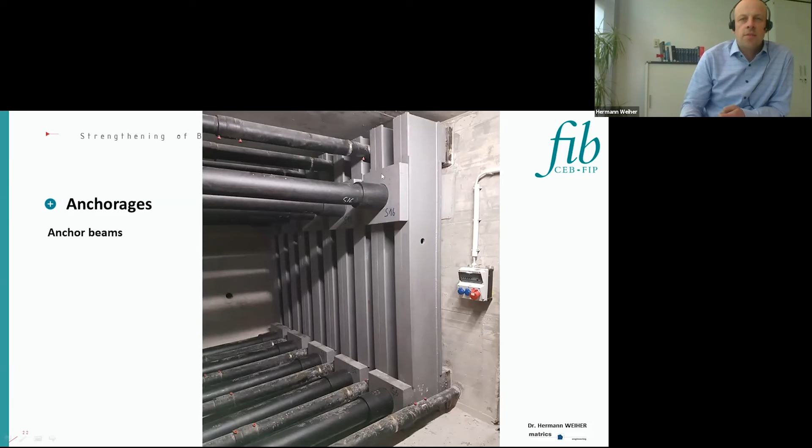But very often you don't have the space, or the end diaphragm is not accessible. Then what you need to do is clamp the anchorage to the web. You need to consider any torsion or bending introduced to the web, so this needs to be compensated by stiffeners. This is usually done by the designer.

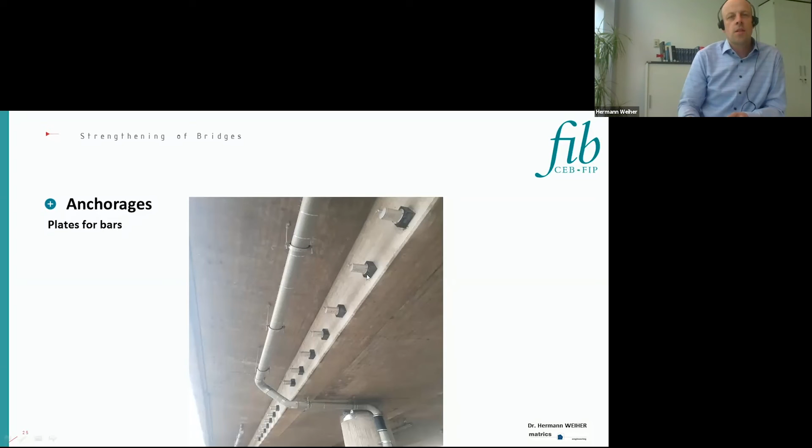Another strengthening example is for the horizontal shear between the box web and the bottom slab. You can have here a little bit larger plates, but you need to be careful. You don't have a spiral in that web, so you need to choose sufficiently big plates.

After the anchorages, a second crucial point are deviators. They need to be formed inside the existing structure, and usually this is done by creating holes in the diaphragm in the pier regions. So you drill a hole and then you either insert one of these half shells, or you bring in a bent pipe and grout the voids in there.

This is, but this is the first time I addressed this: coring or drilling boreholes is very important for that kind of activity.

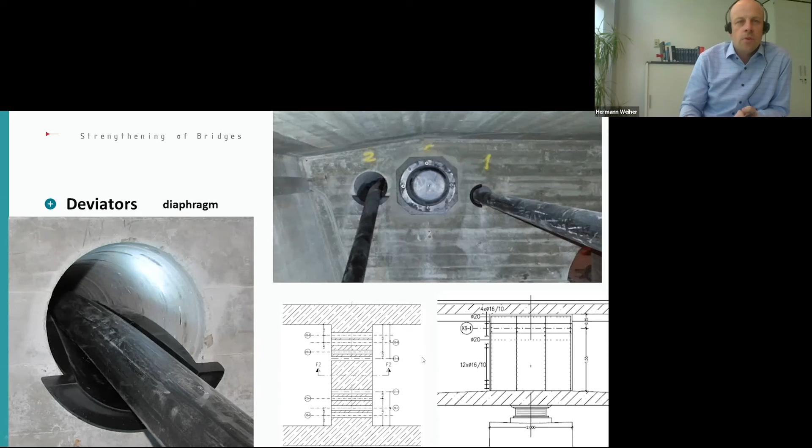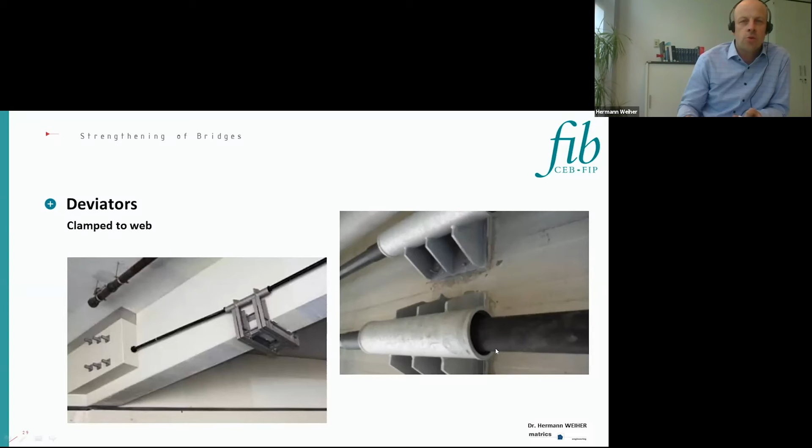So after the two details, I come to the very crucial issue for strengthening measures: the tendon path, as Christian said, is very important. The tendons need a free passage and are not allowed to touch the old structure. So the tendons need guidance by deviators and spacing by creating holes. And before creating holes, you always need to check that you do not destroy things inside the structure, and it would be preferred if you check this before you start the construction.

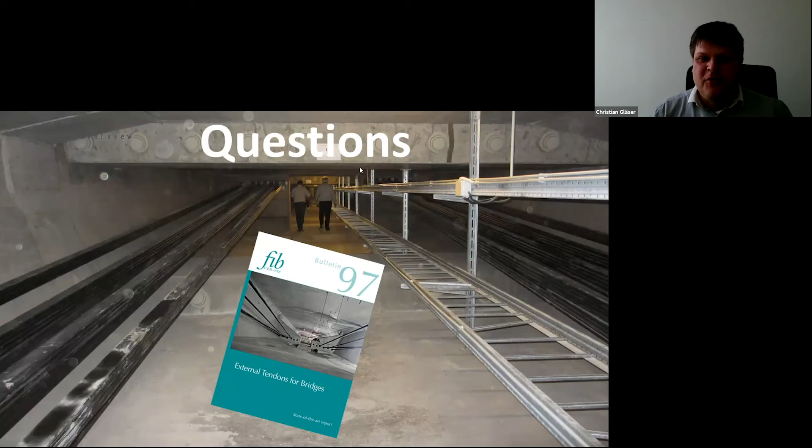There was the question: how is a long prefabricated tendon handled and placed in position on site? What kind of lifting equipment is required? So maybe a quick answer on this.

These type of tendons are usually shipped on drums to the job site. For these drums, some special uncoiling devices are available. The drums are then placed into these uncoiling devices, which are either directly fixed on the deck, on the bridge deck, or, if it's not such a very long one, even still hanging on a crane. Of course, special care needs to be taken when designing these uncoilers, because really strong brakes are needed — because you can imagine, once you start pulling on such a drum, if you don't have the brakes, it will never stop when you like it.

But generally, by considering this, tendon lengths — well, a little bit depending on the size of the tendon — tendon lengths up to 400 meters are typically no problem. What I forgot to mention is that the uncoiler is on the deck, and the tendon itself is pulled into the box girder, for example, by having holes in the bridge deck. Of course, we need to take care that there are no sharp edges, so that the tendon can really be pulled in. So hopefully this is a sufficient answer to the question.